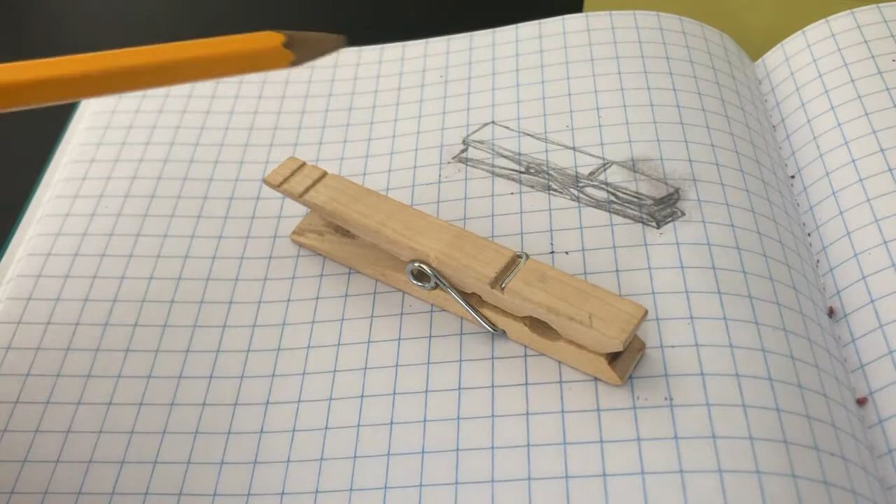You also may have noticed some techniques that I was doing when drawing my isometric sketches. I was spotting my beginning point and my end point when I was going to draw the lines, and I would go slowly back and forth with my pencil lightly on the page until I got the line in the shape or the angle that I was looking to get it in.

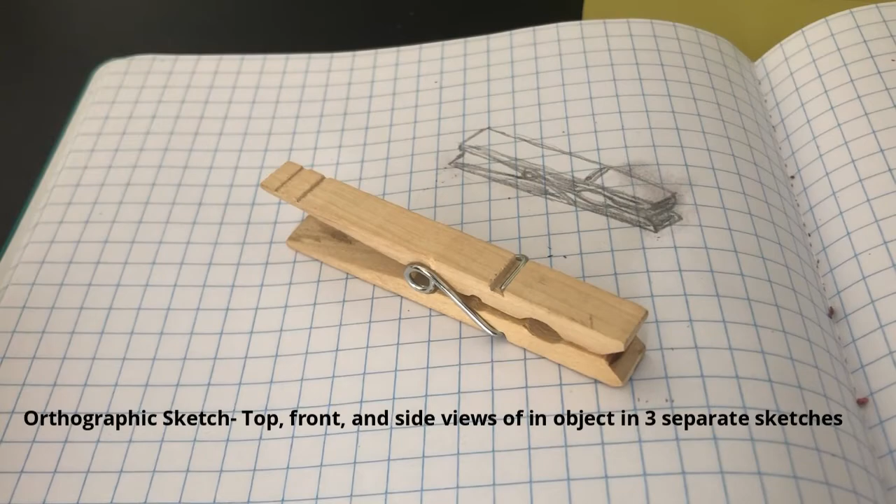So now I'm going to show you guys how to complete an orthographic sketch. Now, an orthographic sketch is going to be the top, front, and side views of an object in 3 different views. So, for that, I'm going to do my top view over here, my front view down here, and my side view down here.

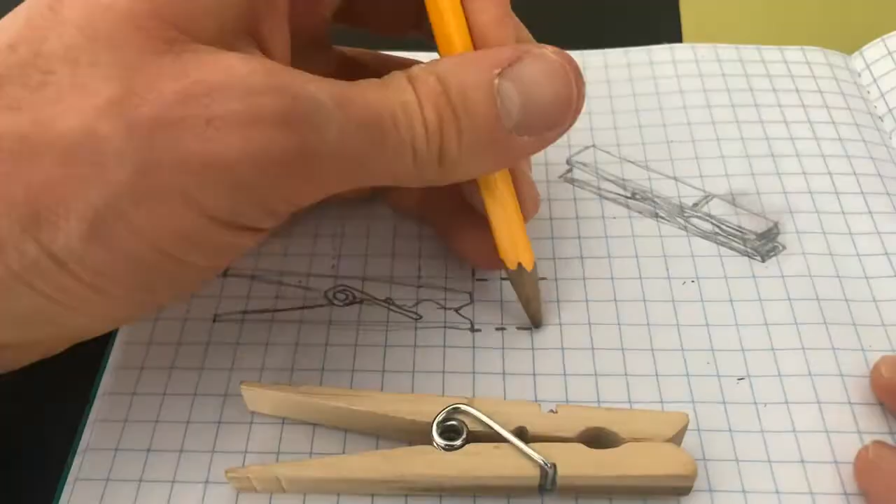So, what you'll notice is, in my orthographic sketch, I did my top view up here, my front view right here, and then my side view right down here. And you'll notice that one of the techniques that I use is these construction lines, so that way I'm able to totally line up my sketches. So you'll notice that my top view is directly above my front view, and my side view is perfectly to the side of my front view.

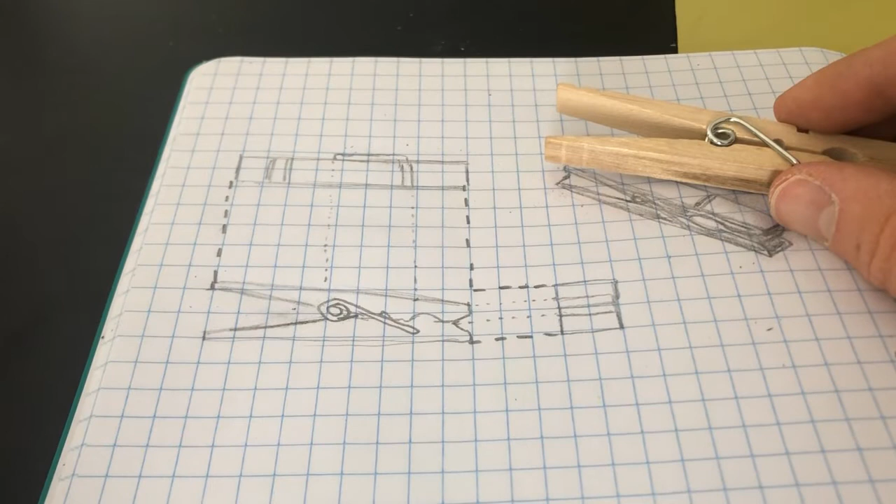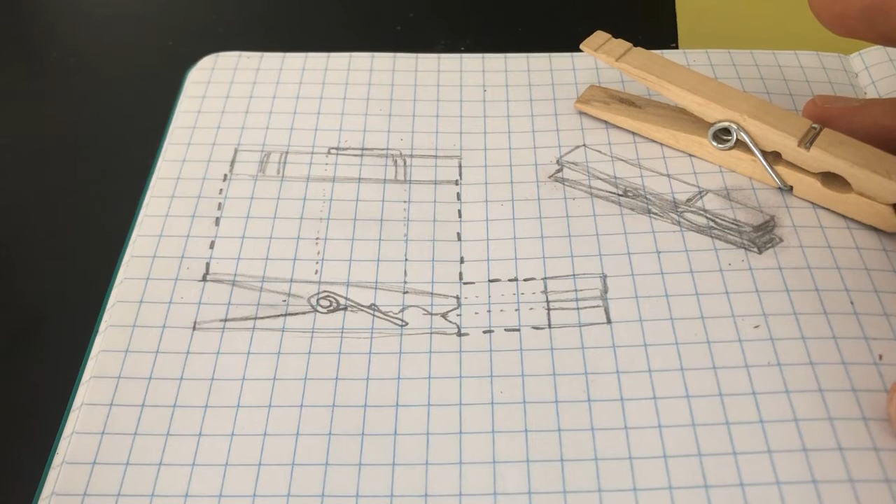Now, the purpose of both these types of sketches is so that you can give whoever is designing an object the exact specifications that are needed in order to recreate that object. So, in addition to what I've got here, now I'm going to go ahead and add in my dimensions. For this, I'm going to need to make sure that I'm using a ruler.

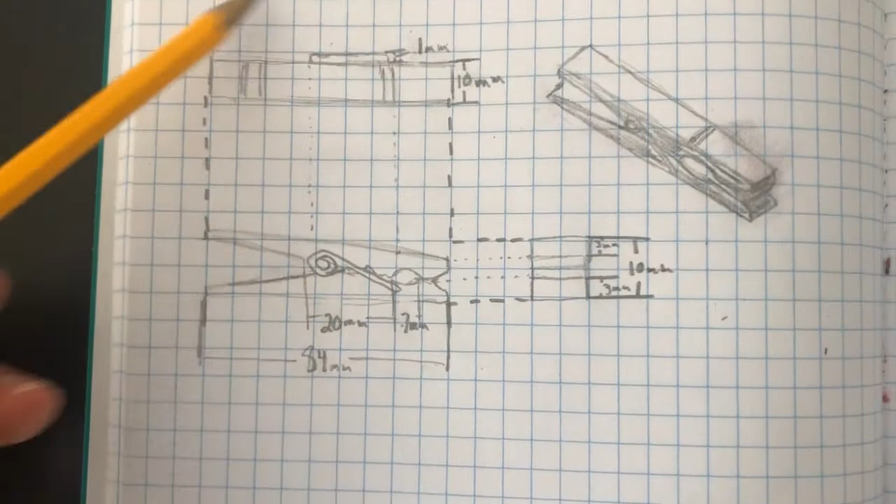So what you'll notice is on my orthographic drawing, on my top view, I put in all my width measurements, and in my front view, I put in all my length measurements. And then in my side view, I put in all of my height measurements. So that way, the object is now fully dimensioned and can be recreated. If somebody wants to recreate this object, they should have what they need in terms of measurements and design.

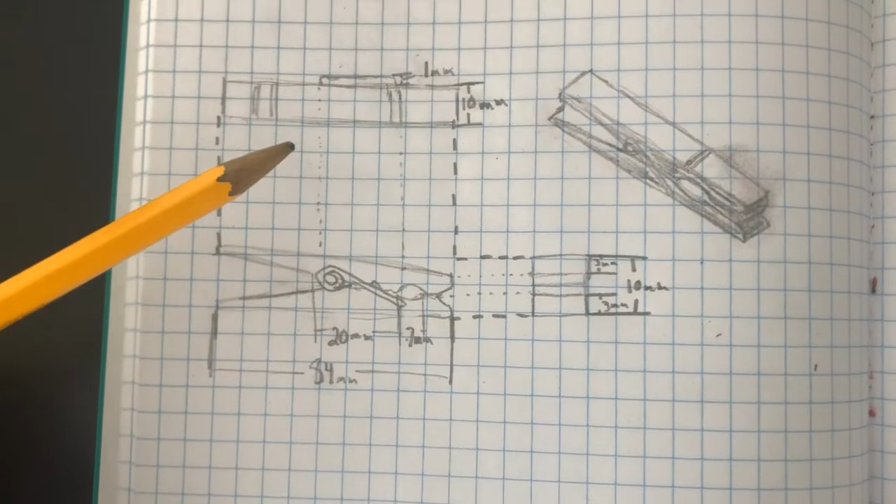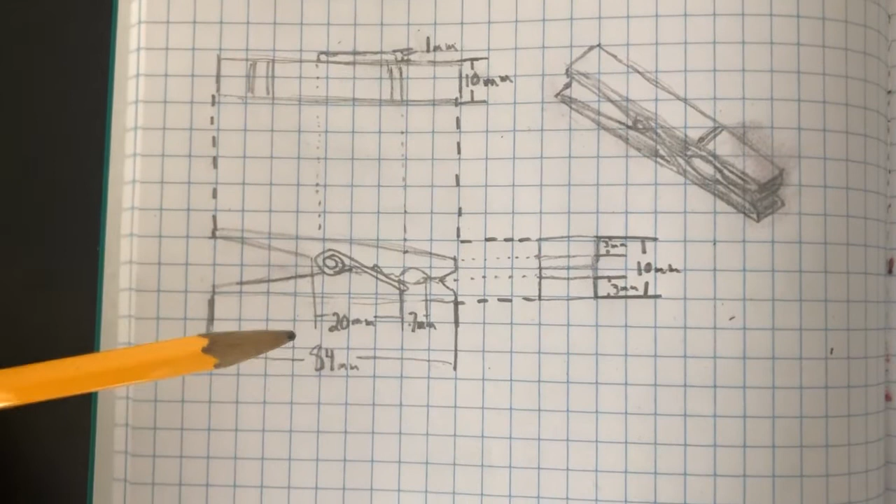Now, what you don't want to do is repeat measurements. So, since you have your length measurements down on your front view, you don't want to also include them up here on your top view, because that just creates more clutter in your drawing. And also, it's super important to have a sharpened pencil, which I don't exactly have right now, as well as you may have noticed that I started to write down the measurements as 8.4 centimeters.

However, it's super important to recognize your units of measurement, such as when you're using a ruler. On the ruler that I was using, you'll notice that one side is inches, the other side is millimeters and centimeters. I like using millimeters and centimeters because I find that they're easier to use. So on a ruler, the millimeters are each little tiny line, while the big numbers are your centimeters. So there's going to be 10 little lines, or 10 millimeters, in each 1 centimeter.

So there you have it. I've got a completed isometric and orthographic sketch of a clothespin.